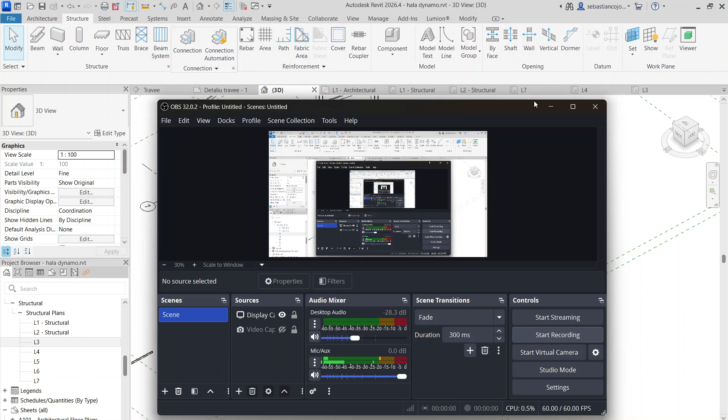So I'm trying to create a smaller scale shed like this one. This was from a script in Dynamo but made in an earlier version, and unfortunately making the connections on the existing model does not work.

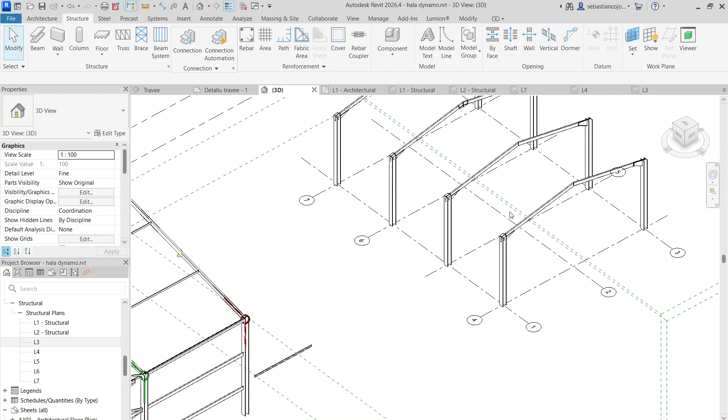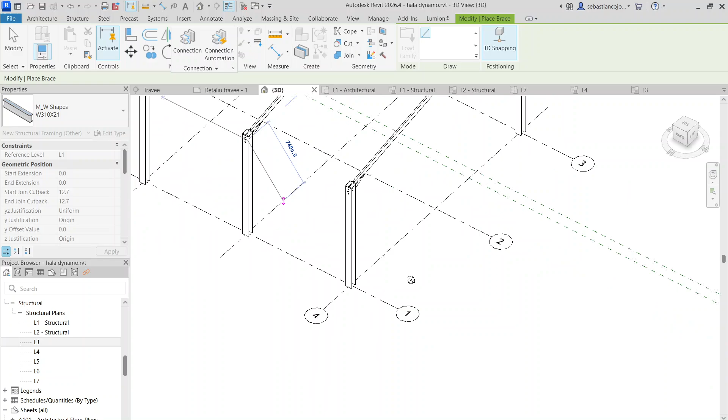So I'll just keep going with this model and do the bracings. I have this structural framing brace, and that's what I'm going to use for some steel bracing. The bracing, if you're honest with yourself, is basically a beam that is already slanted, so it's not much of a difference. The only difference is that there are special connections for this type of connection.

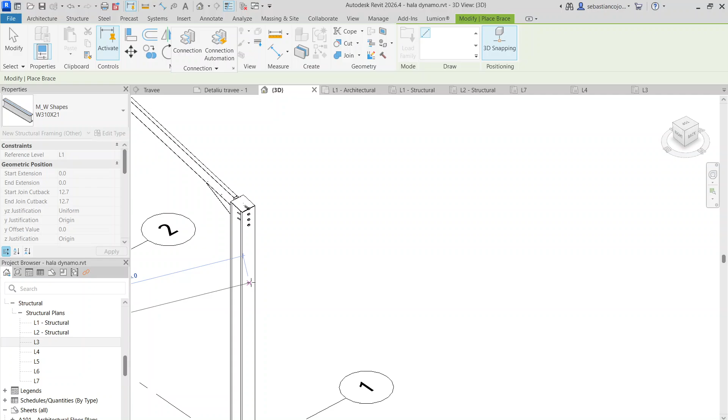So basically, try to 3D snap onto the other column, and you have something like this. If you can see, you have some sort of bracing. You can move it higher or lower, and I think I'll do this height. I'll do kind of two bracings, or actually, just like this.

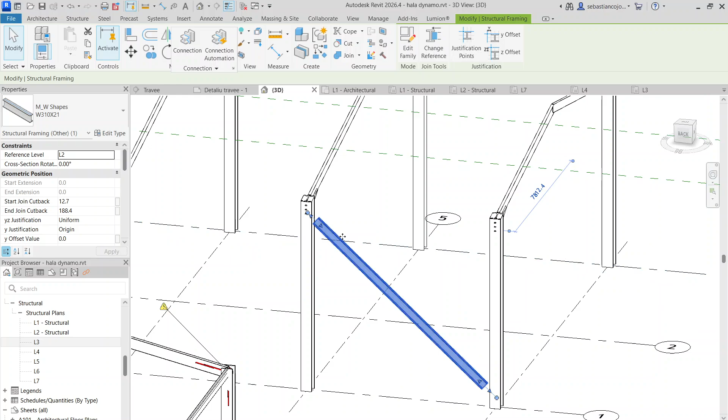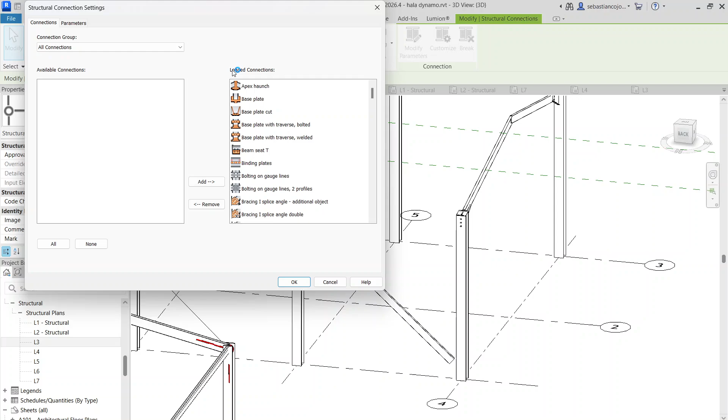And I have two bracings. I think I'll click Control and this diagonal beam, and I create a connection. For this connection, as I imported it using this arrow here, you have connection settings and you bring those connections, so that's something to memorize if you don't see any connection.

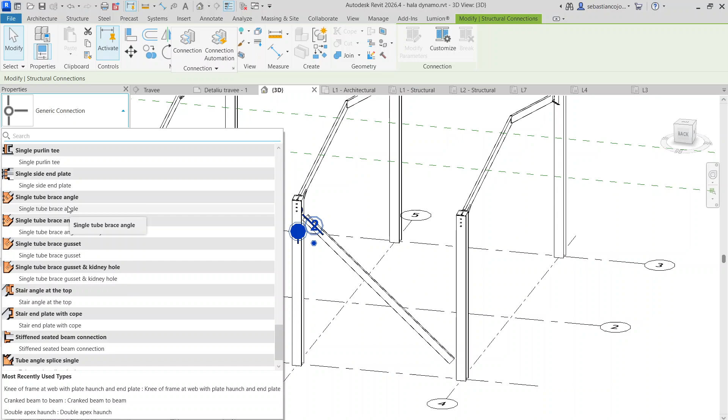So you have these two steel elements selected, and now you just scroll through these options and you should see something like brace single tube, brace angle, single brace angle, kidney hole, brace gusset, and so on. So I think you can use the first one.

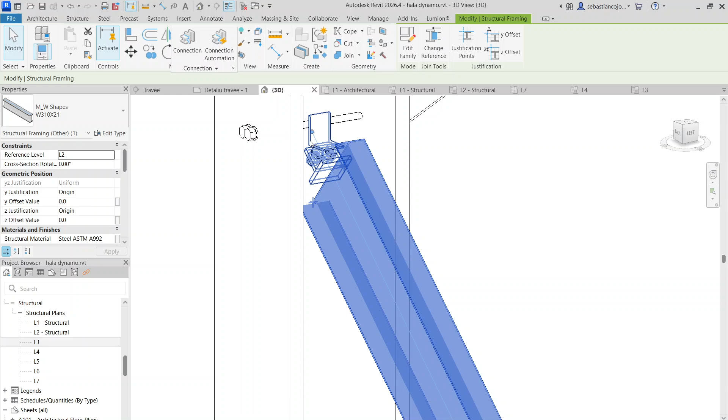And yeah, it should show you something. Yeah, it actually shows you something. It's kind of tiny, I think I would change the connection itself. Oh, it's a single tube. Oh, it does not work for this steel component. Sorry.

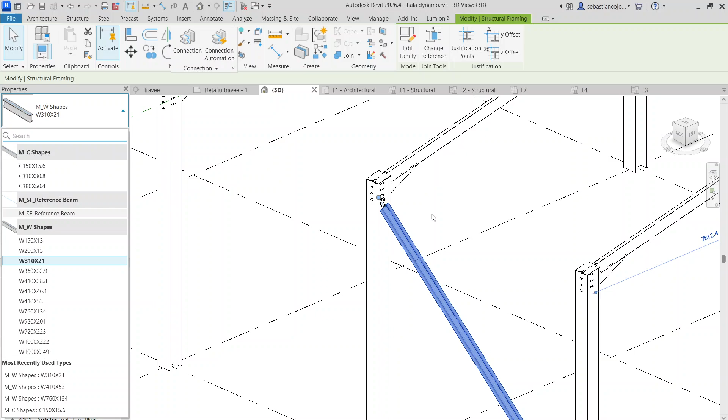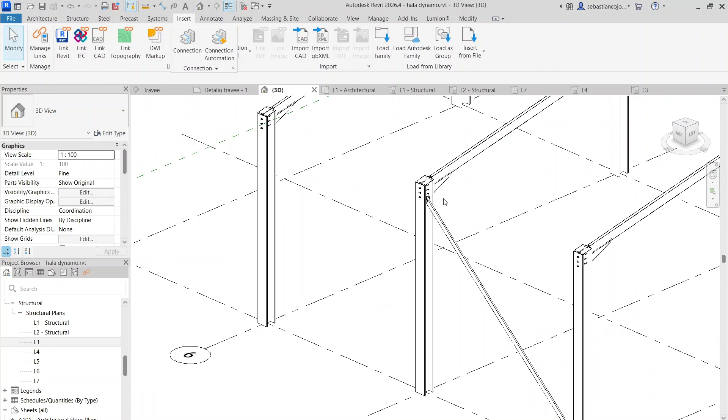Yeah, actually the bracing isn't a beam like this, it's something more like a tube. That's my mistake, because a bracing is smaller, so I would have to change the type, or I can make this smaller. Let's say I make this smaller and I have a C shape or something. Okay, this is more reasonable. Let's say I can keep it like this.

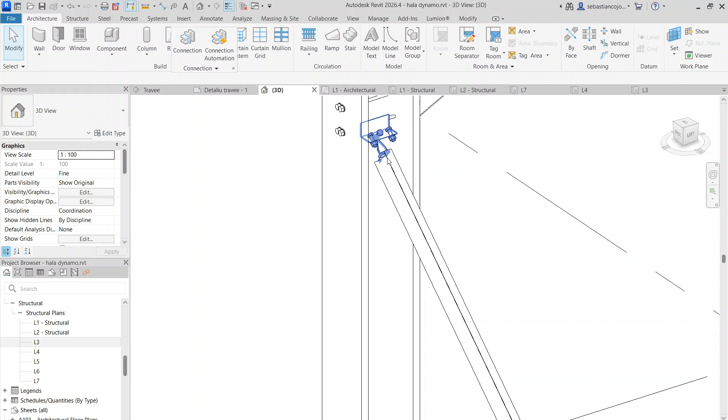Yeah, the option would be to use something like a tube, and maybe I think it can be found. I had a column called Hollow HSS, or some weird name anyway, and I could insert that. And now I'm going to create at the bottom another sort of connection, like I told you. Let's check it out.

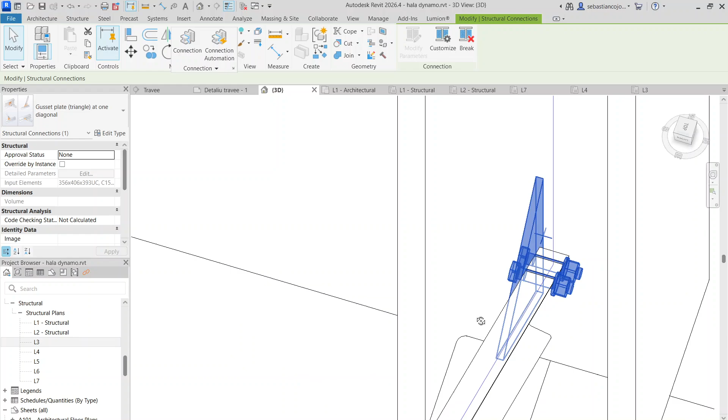Oh, you also have gusset plate triangle and so on. Yeah, okay, you also have this option. But it's kind of inaccurate in my opinion. Okay, at one diagonal, this is more reasonable, I guess. Yeah, it's more reasonable. I think it's not accurate from a geometric point of view. It looks a bit weird, but it works.

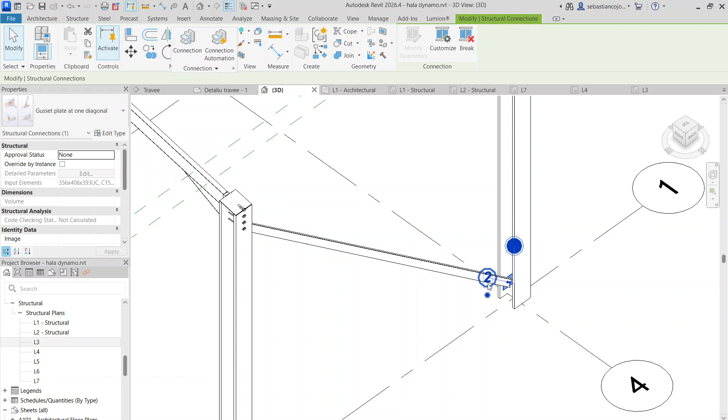Okay, what else do we have? Single purlin, beam purlin, I think that isn't what I care about. Also, that is for tubes. Oh, that is for tubes. Yeah, I should have used these gusset plates.

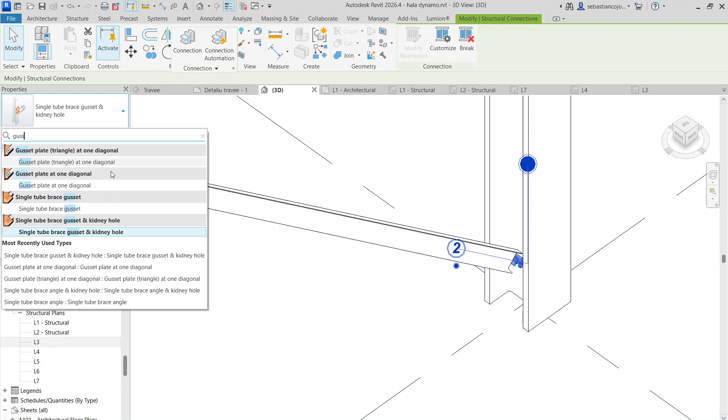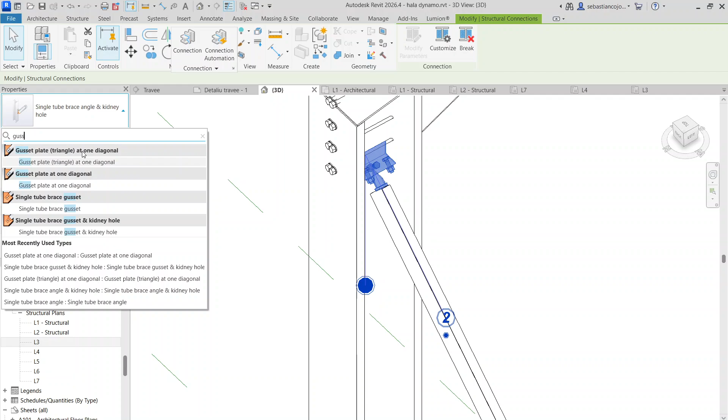So these are actually the settings. Something like this, this should be the proper connection. And if you change this profile with a tube, okay, you use a tube. But unless it's that, you use a gusset plate. Yeah, something like that. So this is a bracing basically.

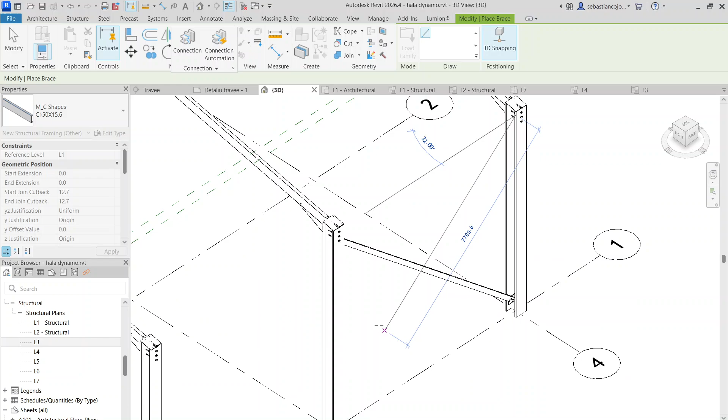And now let's do the second bracing. I create similar and we try to 3D snap, and we connect something like this, and basically we repeat the same process all over again: structure, connection, change here, gusset plate at one diagonal.

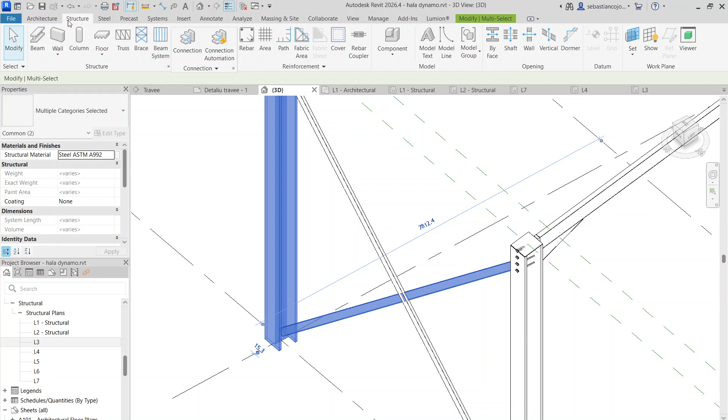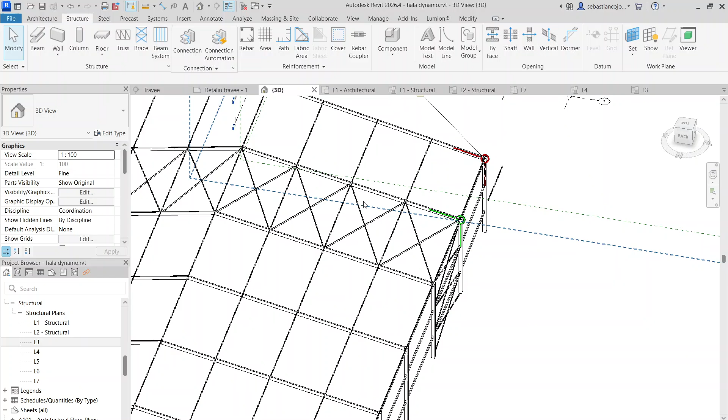This is it. Okay, you have this structure, connection. Luckily I have this kind of connection handy, and now I have the bracing, which is pretty great. And now I think we can also do this, so if you see here, we also have some bracings on here.

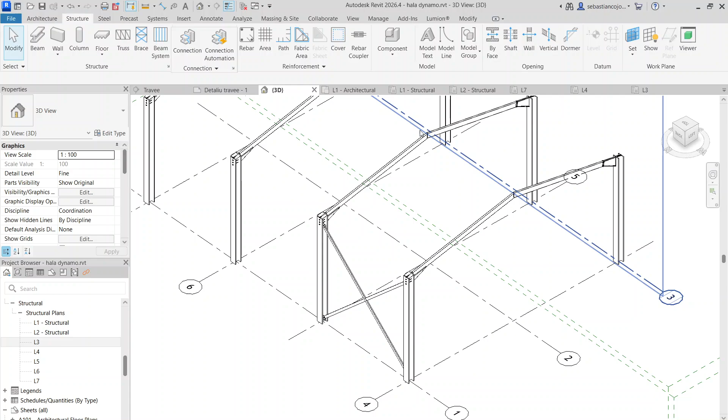So let's try to do it in space. Let's say I'll split this beam area in two, so I'll have a beam over here and a beam over here when I do the beam system. Not yet, but I think it will be recommended to do. And basically I'll have two X shapes in here.

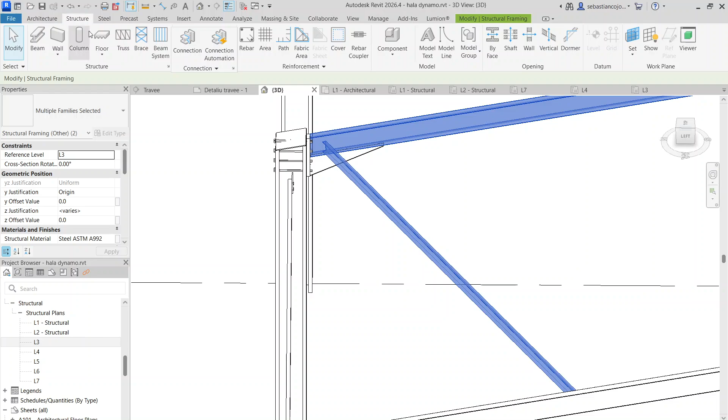So let's try to do another brace. I'll use this 3D snapping, and let's snap onto the middle of this beam or something. Yeah, I quite caught it. And this guy should be connected with, let's see, what kind of connection we have.

Still a gusset plate or nah? Doesn't seem to work as expected at one plate. Okay, let's say we have this. Maybe I would use that tube stuff. Wait, yeah, let's check.

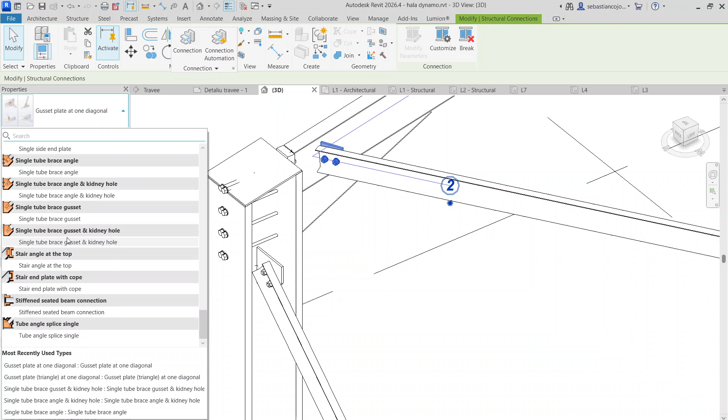Maybe I put a tube or something. This looks kind of cooler, I guess. Yeah, this looks kind of cooler. Maybe we put a smaller C shape. Actually, I don't have a smaller family. I can create a custom one, but I don't care for the moment.

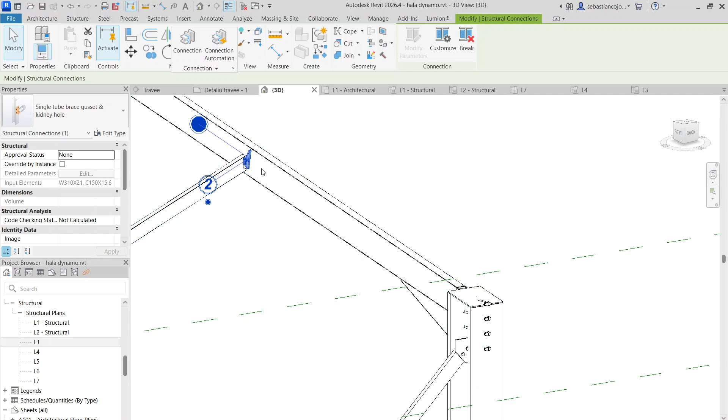Okay, structure, connection. I think I'll use one of these options. No, with kidney hole. Single tube brace. Yeah, single tube brace gusset.

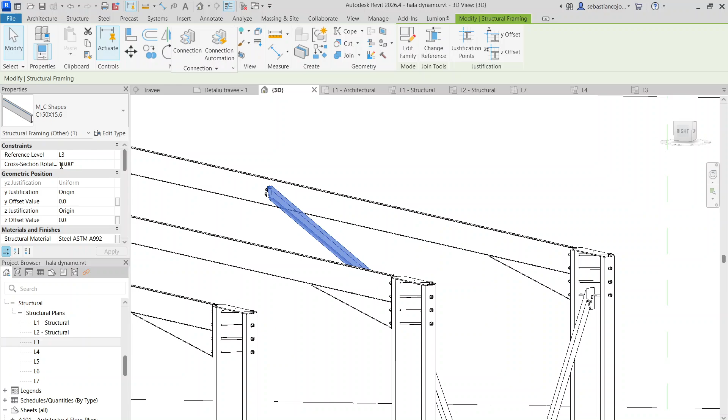Okay, I think I will have to set this beam to have some cross-section rotation. Yeah, that would be useful. Let's see if I set 10 degrees. No, I want actually minus 10 degrees. Yeah, that is better. I wanted to have this profile a bit tilted because this roof is basically slanted and the profile wouldn't come out good.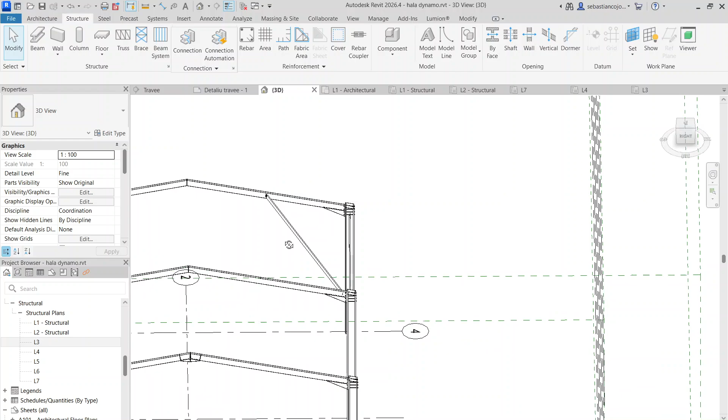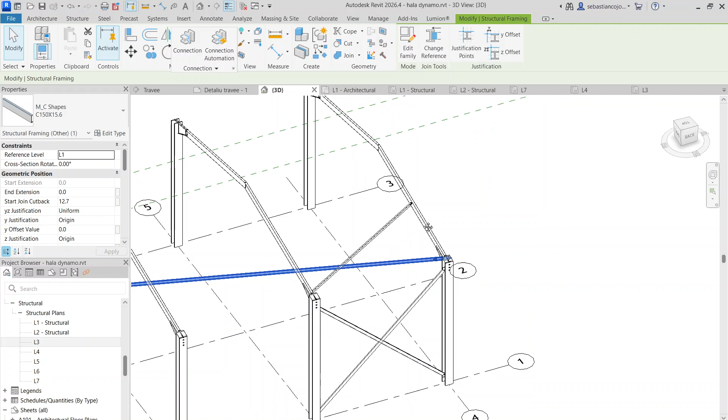Okay, and now I want to do the other X, and I have basically four guys like this. Create similar. I have this 3D snapping. Okay, and something like this. Oh no, I snapped wrong. I didn't snap it to the right place. Yeah, something like this. I had to snap to the column. Okay, and now I snap this guy over here or something like that. And let me check a bit and hopefully catch where it needs to be caught.

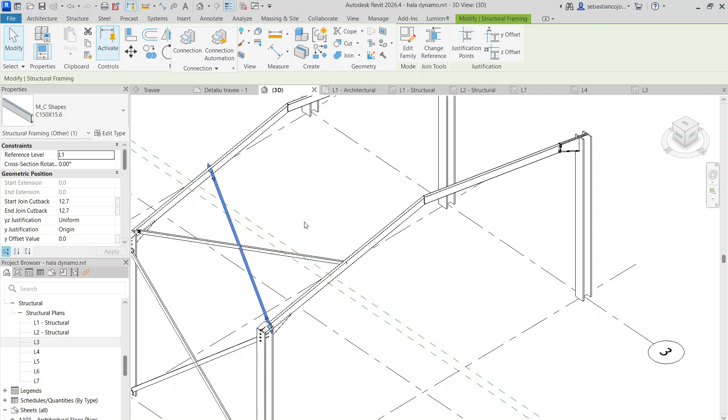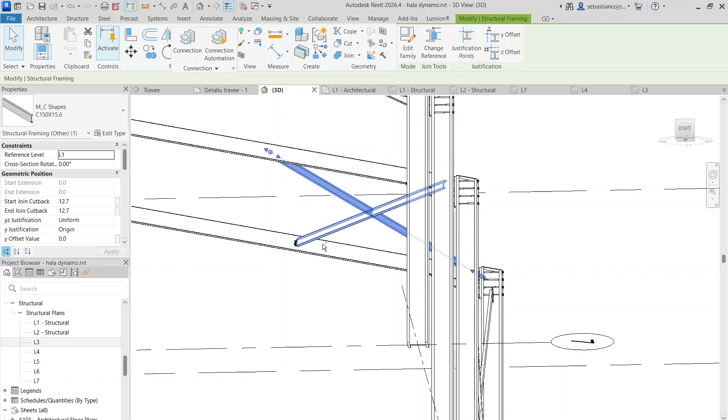Sorry. Yeah, it will be some sort of overlapping. I guess later it can be solved. I just do it to show as an example. Maybe one should be more to the top, or supposing you have steel tubes, one comes more to the upper part and the other one comes somehow different. So yeah, okay, let's make the connection like this.

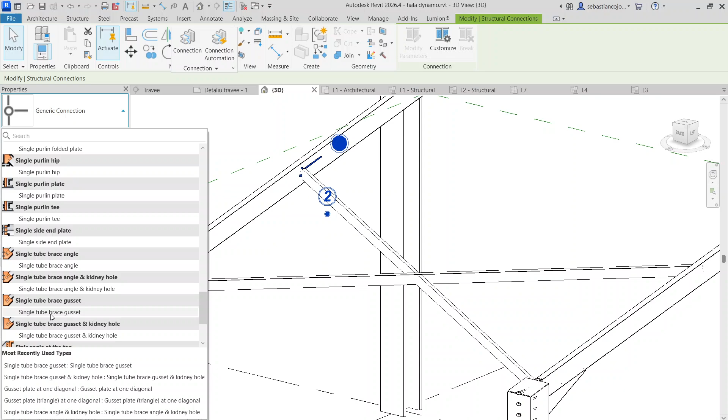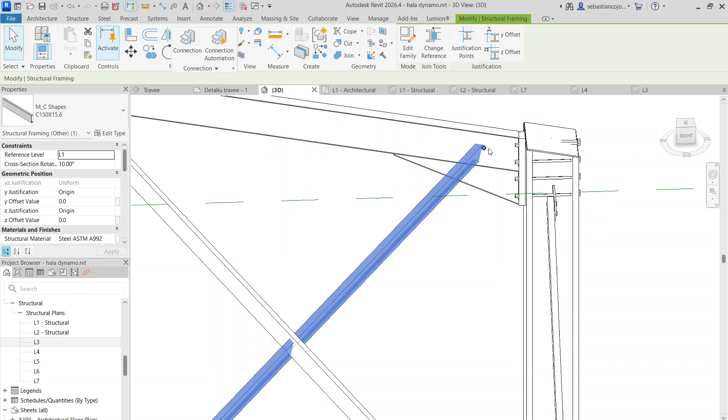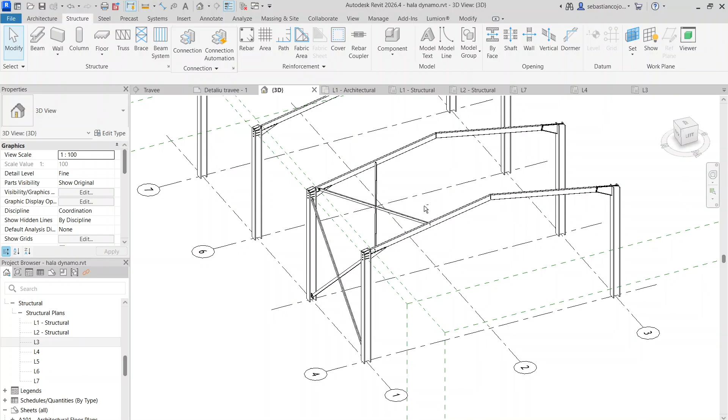Connection, change it to whatever. Yeah, okay. Minus 10 degrees. Oh no, in this case I put 10 degrees. It's a bit different. Okay, and now I'm pretty satisfied. This is to connect it to that thing, and I think I place it something like here. Connection yet again. I have this single tube brace. Yeah, you can change the connections later. I just put them for you to see how to work with that.

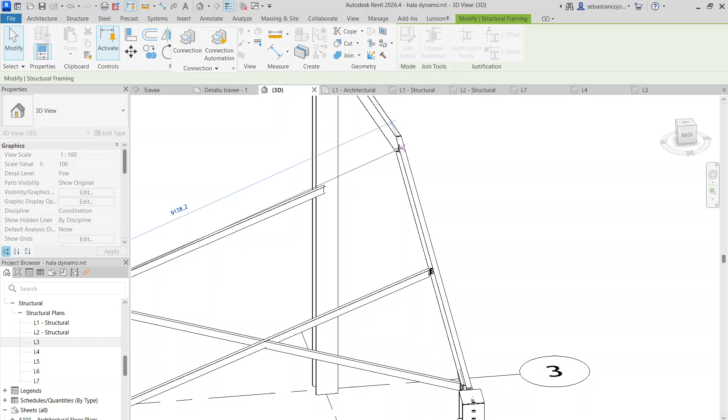I'm curious, can you copy it onto the same plane? Not really, honestly. Anyway, let's say I snap this guy over here in the middle, or close to the middle, and this guy over here. I think these four guys could actually form a connection, and I'm not sure. Let's check.

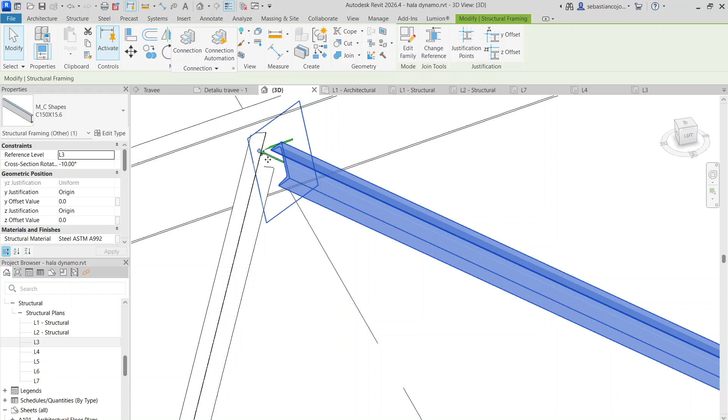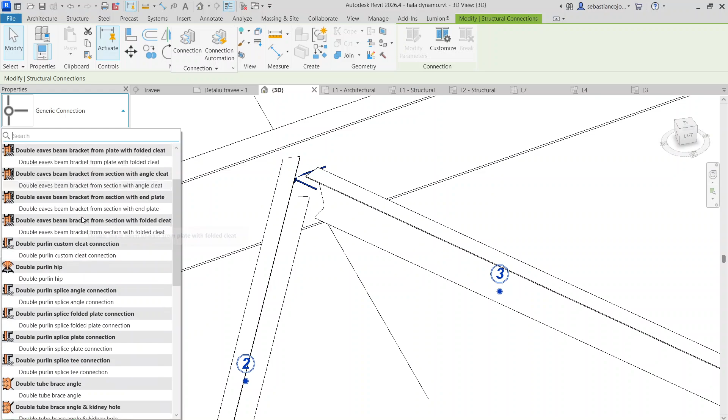So let's check if we can do something meaningful with this type of connection, and see if we can have more things connected, or four things at one time connected. So double tube brace angle. Yeah, actually we have. Yay! So we have double tube brace angle or something like that. That's great. That's what I wanted. Okay. So we might as well continue.

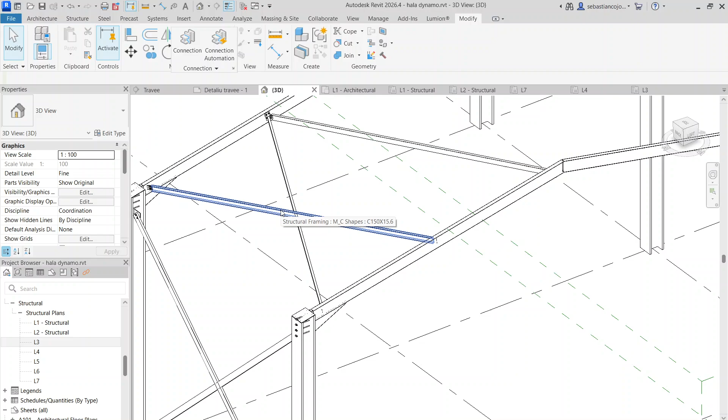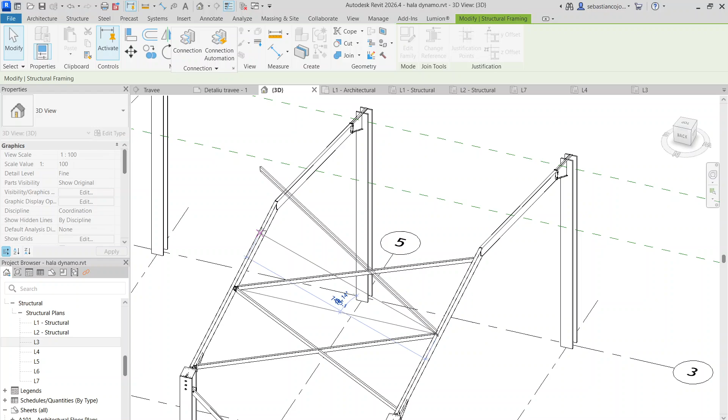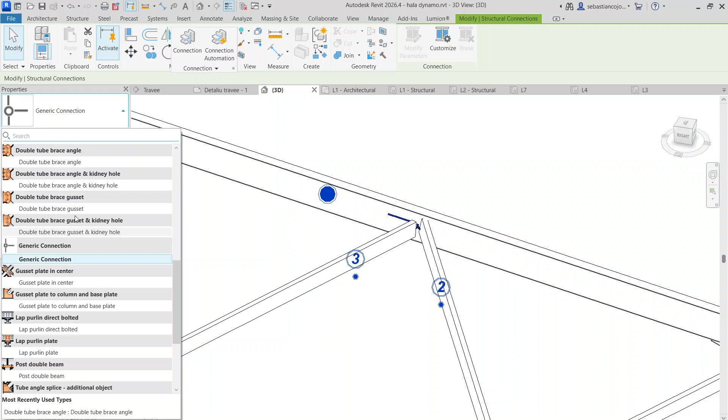Let's see, to do the last component and create similar. Start from here until the apex haunch. Okay, it's poorly placed, but we'll solve this. Yeah, something like this. This one, so I delete this connection. I select these four guys, connection, and I have double tube brace gusset. Okay, that's great. So if I have two in the same place, I can put a special connection for them, which is great.

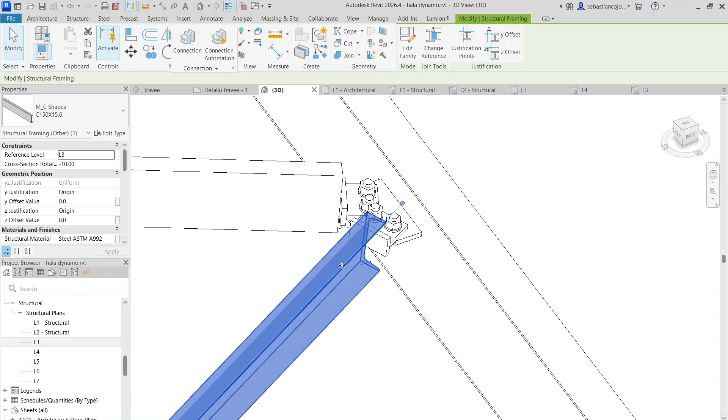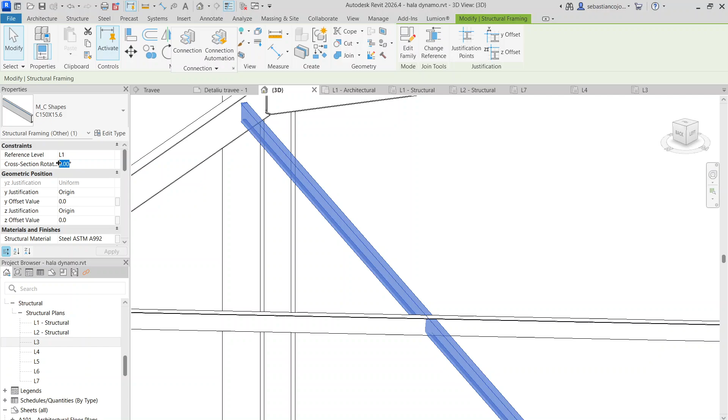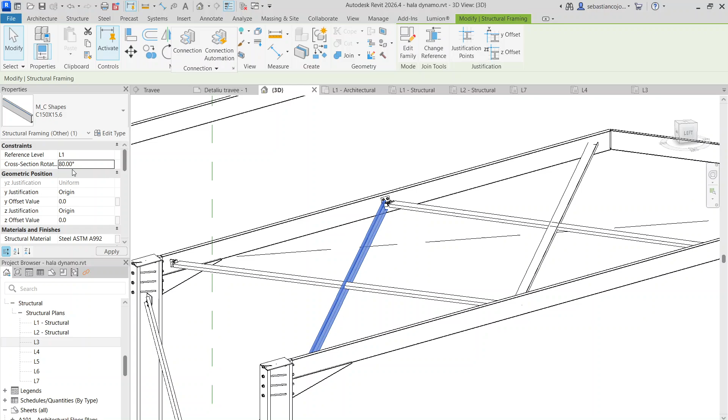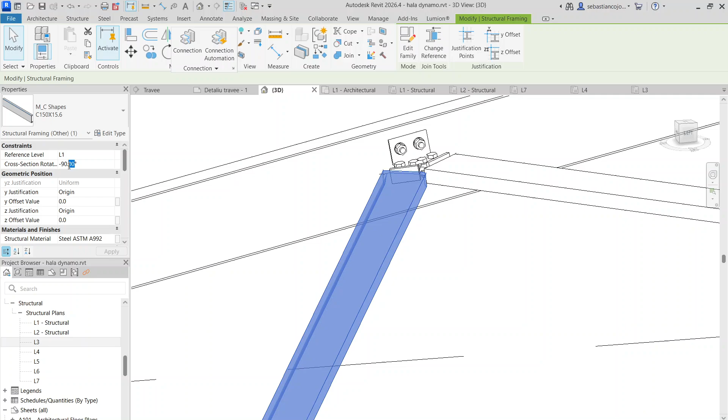Now that I'm thinking, I would change them to, let's say, minus 100 to rotate 90 degrees. Yeah, something like that. And maybe I would rotate this as well at 90 degrees. Okay, great. Oh no, I have to rotate each one separately, so this is minus 100. This is, I think, 80, not sure. Let's say minus 100. Minus 90 maybe. Okay, minus 90 I think is the definitive answer. Let's check. Yeah, so it's a bit different.

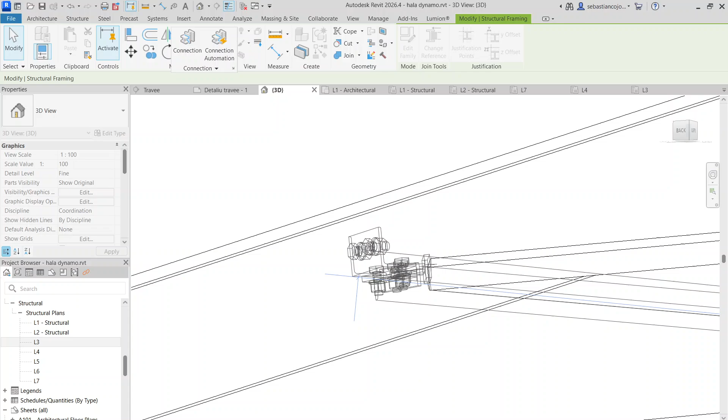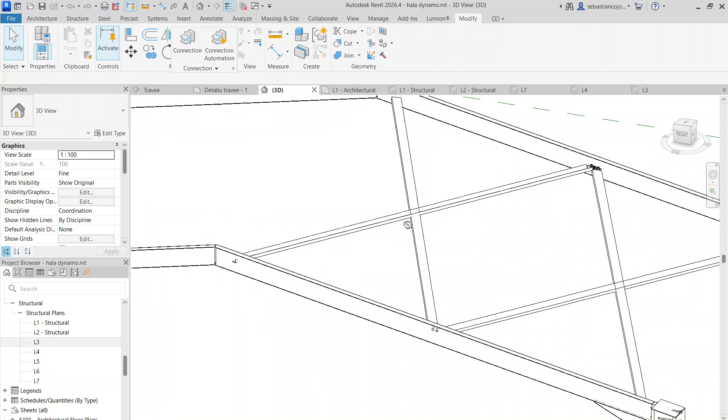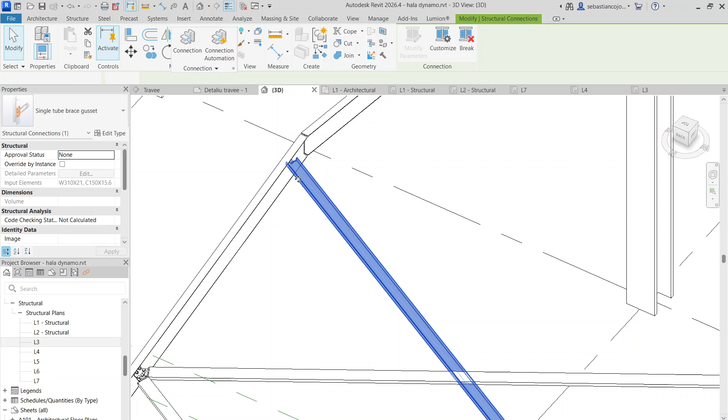And this way the connections may not overlap. Supposing we put all these guys high enough, the risk for overlaying will reduce. So you have these diagonals with no overlay here. Or maybe there is a connection, but I don't think it is the case. So you have this, and you create a connection, the tube, yeah, tube gusset. It should be adjusted a bit, but I leave it as is. You have time at home to change it to your preference. I just show you how to do that.

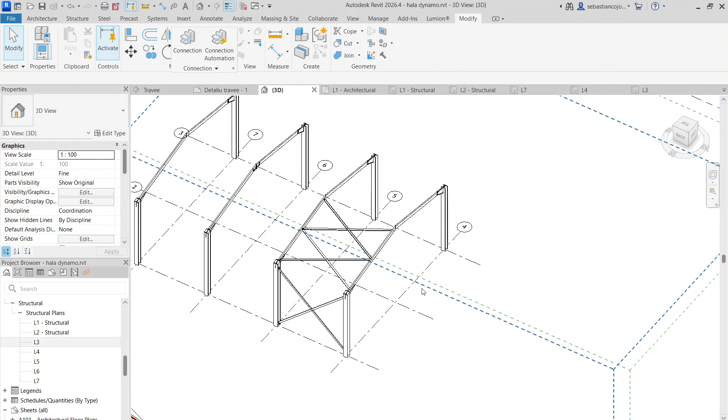So basically we did the bracings for vertical and diagonal lines, and this is how you continue to add, as it is added here, if you can see. I hope it was helpful for you, and we'll keep going with the rest of the topics. We'll work with the beam system.